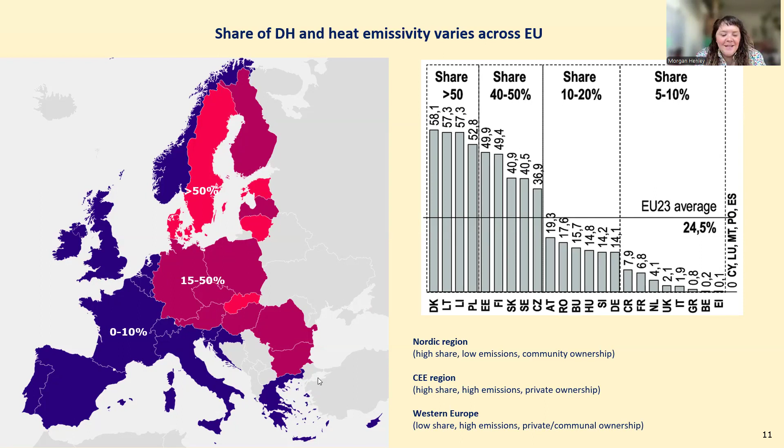I'm based in Prague, Czech Republic, so characteristic of the whole region, there's a lot of aging systems. Here it's still a lot of coal use, but some going to gas. Here are some numbers. Whereas in the Nordics, there's a quicker transition to renewables, and the Baltics are something in between. I think we'll see the innovation that's happening there.

So when you have these existing systems that were built maybe 60 years ago or more, how do you change them if they're based on really high temperatures, needing combustion to produce the heat?

There's a few different suggestions that we would always ask to consider. So, big renewable integration, so large heat pumps, and that can come from seas, rivers, air, geothermal, waste energy from cooling or from industry. So the waste heat integration can also be from whatever kind of industry you have - it might be applicable, it might not.

It would really depend on your circumstance. Deep geothermal, that's of course going to be if you have the capability to do it - not every geography will be able to support it. I know it can be a complicated and expensive process, but once you have it, it's quite reliable.

And then also, one thing that we are always trying to advocate is just to diversify - that instead of having one big plant burning coal or gas, that you have different sources. So also they can be used at different times when there might be a better opportunity for one versus the other. And also sector coupling, so really being able to pair different things together, which will also help with flexibility.

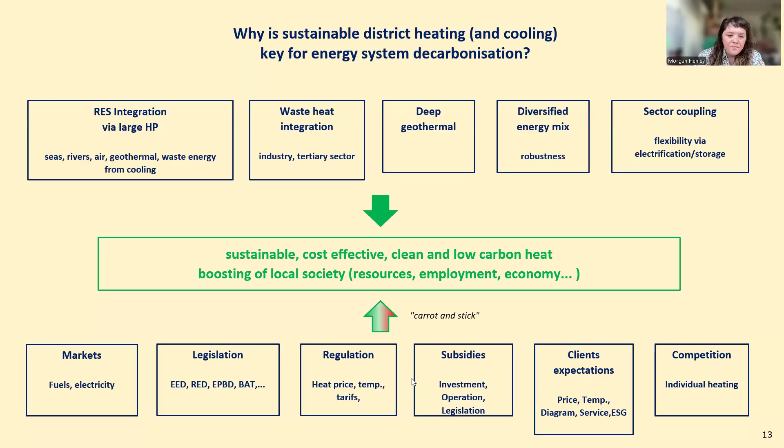So, as I mentioned before, EU legislation - I think many of us understand the need and how important heating is in the entire energy mix of the EU. It's a bit unfortunate, but the heating sector is kind of hidden in multiple pieces of legislation.

The Energy Efficiency Directive, the Renewable Energy Directive, and the Directive on Energy Performance of Buildings. Before that there was the EU heating and cooling strategy, but it's quite outdated by now. Maybe we'll get a new one in the coming years.

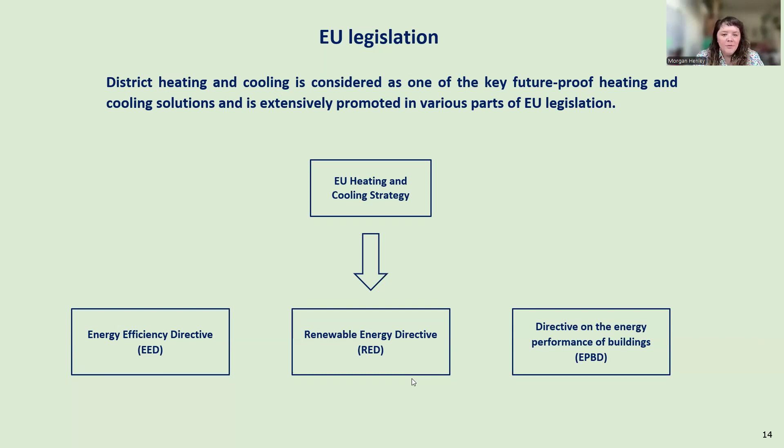But I think the one that's most important for us is the Energy Efficiency Directive, the EED. It's quite long, with many different provisions in it, but the one that's most useful for us to look at here is the heating and cooling assessment and planning.

There's a lot of text and requirements in here, but I've highlighted the general main points. This is the actual language of the legislation - you need to do the assessment, make sure stakeholders can participate, do a benefit analysis for the different policies, and identify what the potential is.

And then there's this planning requirement for municipalities of 45,000 inhabitants or more. There's a lot of different things to consider when doing these plans.

What we provided in this methodology is a checklist of all these things to look at - discussing with different stakeholders, considering existing energy infrastructure, putting energy efficiency first. This is the whole guiding principle of the EED.

Mapping the potential of how to improve the energy efficiency in homes or buildings. Also making sure vulnerable households are considered specifically.

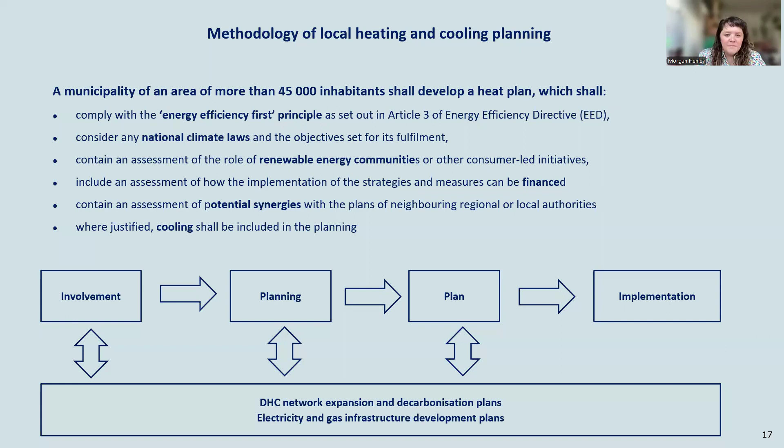So I added a theme to the images for the rest of the presentation. I don't know if you know this series of children's books - it's called Busy Town. It's American - I'm from the US - and it's basically about a happy town where you have different animals living together.

I thought it was kind of a nice idea for thinking about how we actually need to plan our district heating - everyone needs to be in touch with everyone, talking about how can we help each other and how can we find the best ways to cooperate.

So here is again a list, and just to reiterate - the municipality when doing these plannings really should look at the different stakeholders, so all the affected different public authorities, businesses, public interest groups.

So large scale consumers of heat or gas - the big companies, if they're using a lot of gas, how would they be able to transition out of that for their heating needs? Or small businesses that also need to be considered, but might be using quite a lot - whether it's grocery stores or malls or schools, if you're getting to the public sectors.

Then, the bordering municipalities - the 45,000 threshold shouldn't be a strict requirement, but if there are smaller municipalities around, it's important to go hand in hand because there can be synergies. Associations of municipalities, depending on where you are, state authorities, real estate companies - they know what the building stock is like, so it can be important to speak with them and they can also help plan future district heating connections, as well as chambers of commerce.

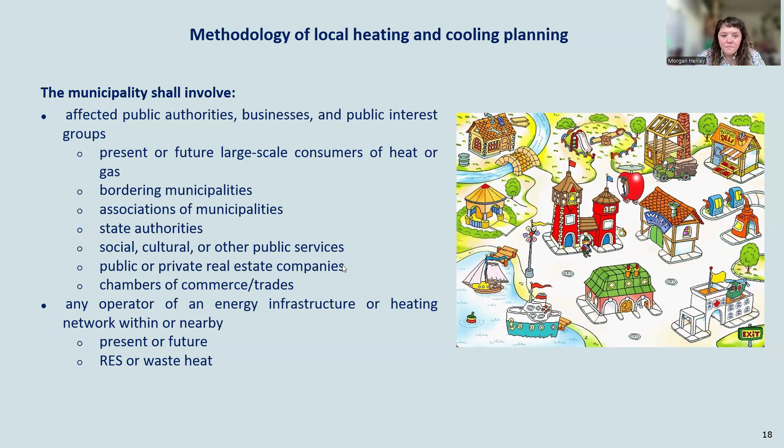This is really getting into the things to look at - inventory analysis: the consumption, the temperatures, the emissions, the generators, the heat sources, the networks, what's decentralized, the building stock. All of that is data heavy stuff, but it's the way to see what you have at your disposal as an asset, and also the things to work and improve on for energy efficiency.

Then potential analysis in a quantitative and spatially differentiated manner - the energy savings potential in different residential or commercial processes, the potential for generating heat from renewables, waste heat, or central heat storage.

And then known restrictions - if there are things already known that can be done. For instance, if you know there's no geothermal underneath your ground, or it was looked at and can't be done, things like that.

And again, the target scenarios looking at the final year, but then also progressively the intermediate goals.

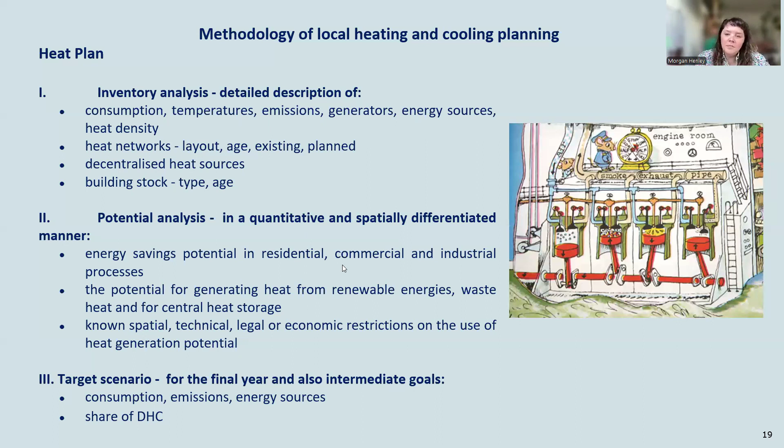So different heat area supplies for the construction or expansion of district heating and cooling, for decentralized heat supplies in areas with increased potential.

Then description of types of heat supply - very probable, very suitable, or not suitable. Just really mapping out and saying this is very likely to be - if you have a river, very likely you could put a heat pump on it. If it's really cold or something, then maybe not. So it will all really depend on your geographical reality.

And then the most important thing is the implementation. A plan is only as good as it is used, so really making sure that it can be put into use. What are the dates? What are the costs? Who's going to pay the cost? What are the positive impacts the measures will have, and what are the objectives of it?

Also measures on how to target the consumers to make sure they're brought along in the process as well. Risk and sensitivity analysis needs to be done when implementing. And there might be specific scenarios that come up with district heating consumers or producers that may also have to be handled case by case.

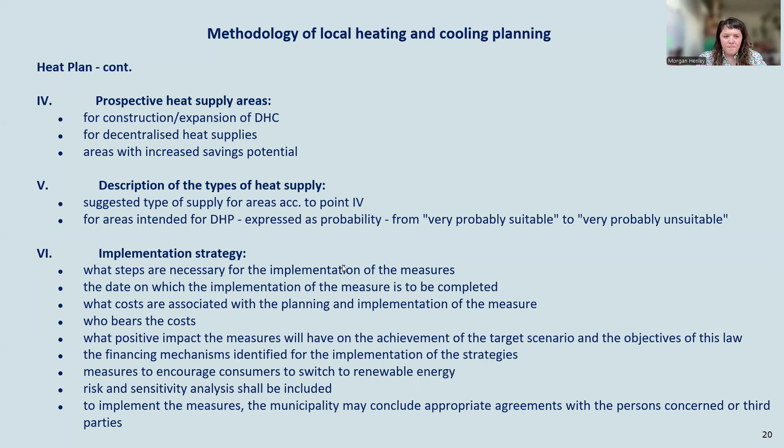Then also the requirement on the operators of the heating networks, because this was before really from the municipality point of view. But this can really only be done if they're working together.

So drawing up the heat expansion plan needs, from the heating networks, a description of the state of the network itself - how are the pipes, how are the heating fuel sources, what is the potential that they know of, what are the future development plans, do they have any decarbonization targets, are they planning to expand, and what do they really need in terms of investments?

Every district heating company and municipality is going to be different - there's no one size fits all. There's a saying that you can't understand another person's marriage, and I think you can't understand another district heating company because there are so many different specificities to it - you really need to know it inside and out yourself from your own personal experience.

But all of that to say, I think talking to the businesses, talking to the municipality, seeing what you have available - these are things that I think were done really well in Salaspils, really looking around and figuring out the puzzle of what's there. So I'm really happy that you can see that in action with the next presentation from Ina. And again, happy to send out the methodology and discuss it with anyone if interested.

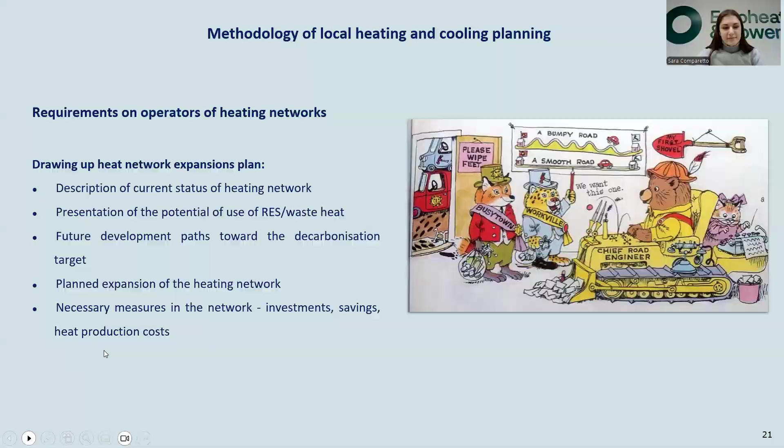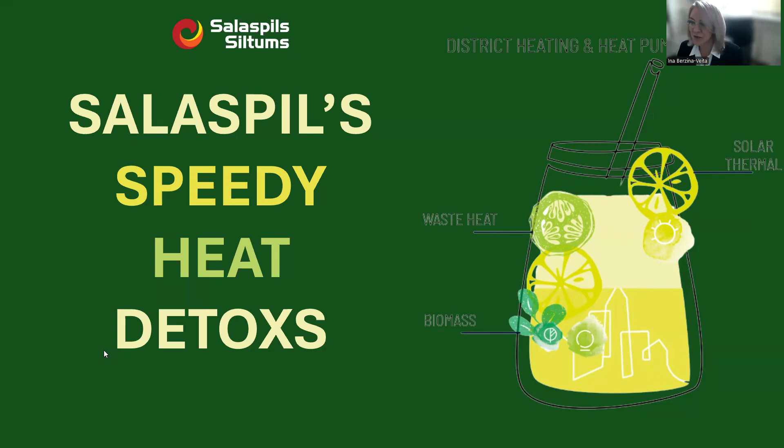The topic of my presentation is actually Salaspils' speedy heat detox, but I'm going to talk about a little bit more than 10 years. So, then we can decide, is it speedy or not.

My name is Berzina-Veita, and I'm managing director of Salaspils Siltums district heating company, and also president of the District Heating Association in Latvia. My aim is sustainable energy, and I'm focused on emission-free technologies. That's what I've been looking for more than 10 years already.

So a little bit about Latvia. More than 65% in Latvia are using district heating energy, and there are 2,000 kilometers of pipe with quite low heat losses. This is the result of the last years of work.

As you know, Latvia is a small country with only 1.9 million inhabitants, and a big part, nearly half, is living in Riga. Riga is also the biggest district heating system in Latvia.

Salaspils community is placed just behind Riga, with only 24,000 inhabitants in the municipality, and we are serving about 20,000 of them with district heating. There are three areas: Salaspils, the major city, and then Saulkalne and Acone. In Acone we are only the operator, taking heat from the same CHP plant that supplies Riga. We are an operator trying to do it as efficiently as possible in this small village.

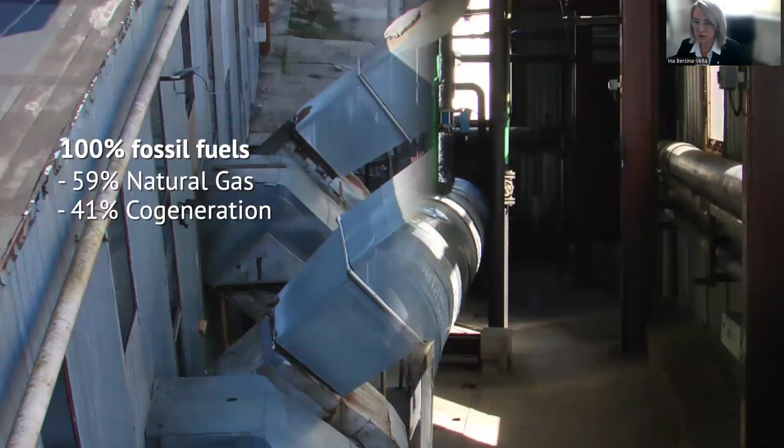A little bit of history: I came to Salaspils Siltums in 2011, and it was like a horror movie at that time. Everything looked just horrible. Production was horrible, 100% fossil fuels. There was one company renting the premises and producing heat with cogeneration on gas. It was the city with one of the highest tariffs and big debtors, no money.

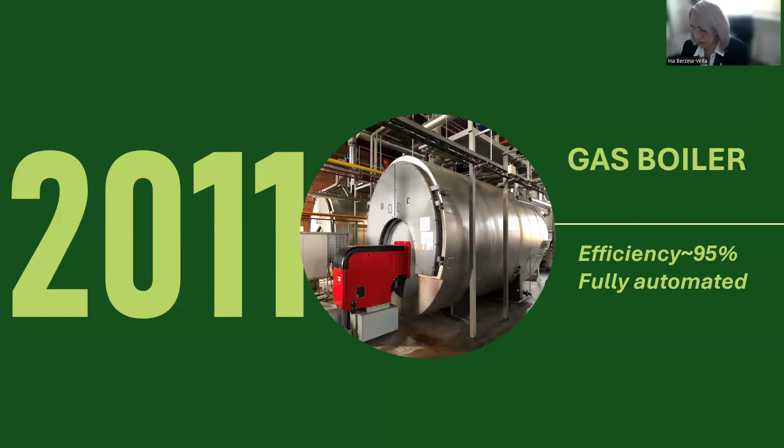So what we did first was inspect everything, and we replaced the old, inefficient gas boilers with new automated ones. That was the first step we took.

Then the next and most important step in the meantime was the remote data control system, where we can see online what we are doing, how is the consumption, temperatures, and all those things. We also did the project and plans and changed the pipelines. You can see the old ones, and now we are 100% insulated and finished with those things.

Actually, with changing the control system and changing the pipelines, that first year there were 25% savings of heat, which means it wasn't just the losses in the pipes, but also the incorrect readings of heating consumption, you could say.

In the meantime, we got into a European project and built the first wood chip boiler. After a while, we also added a flue gas condenser to this boiler to increase efficiency and produce more from the same fuel.

So today our structure looks like this - the production structure, and here are the priorities. First priority is solar. The next priority is wood chips, and the third, like a peak source, is natural gas.

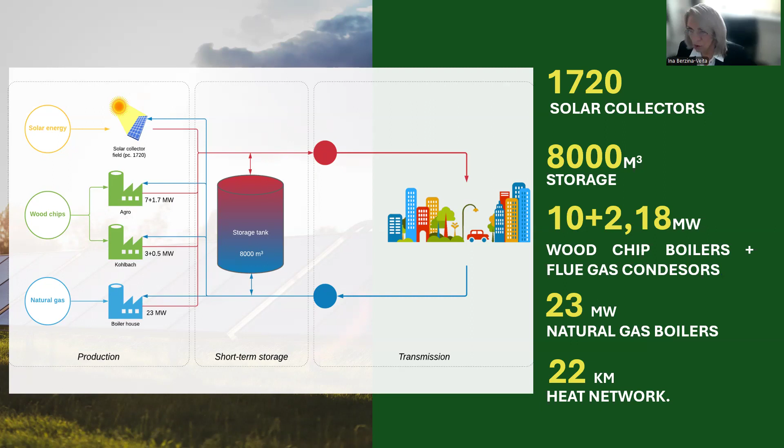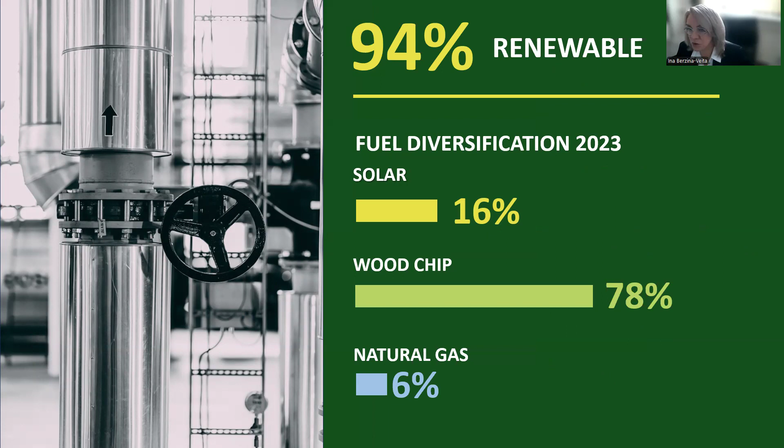We still have our old previous gas installations, but we're not using them so much. That's how our diversification looks today: 94% renewables, including solar, and 6% natural gas.

So what we've gained: today we've decreased CO2 emissions by 93%, based on last year's data, and we also reduced the annual heat losses from 22% to less than 10% per annum.

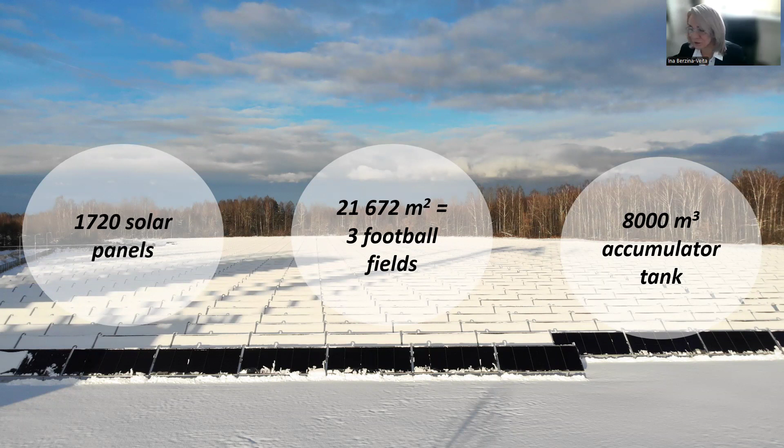That is the size of our solar field. That's how it looked about 3 days ago, when we last had winter weather. And yesterday, although there was snow, it melted, and we produced 22 megawatts of heat from solar.

It's already empty, and now we have a ready project where we want to replace and take away as much gas as possible, especially during summertime - it's a good place for a heat pump here.

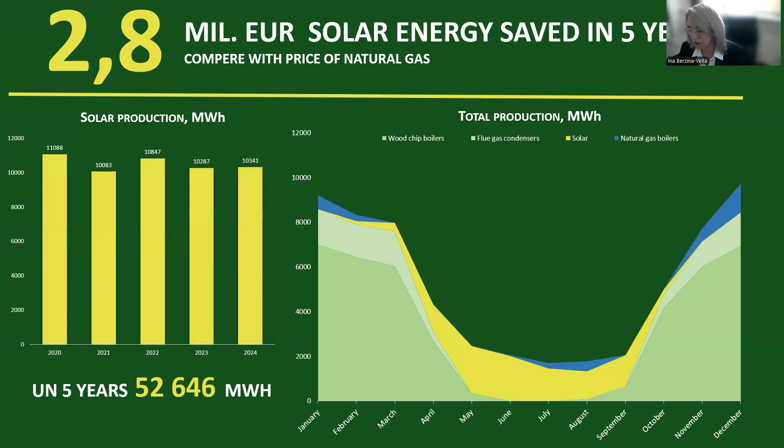We also had our own investment, including emission trading quotas, which we saved because of renewables and reducing CO2.

It's very important that when we put in the remote control system, we have a bigger connection with inhabitants. We talk with them, helping to set the right temperatures for their houses. With this controlling and communicating with every house, we reduce consumption because it's optimal, not too hot - we regulate the automatic system so it's used as optimally as possible.

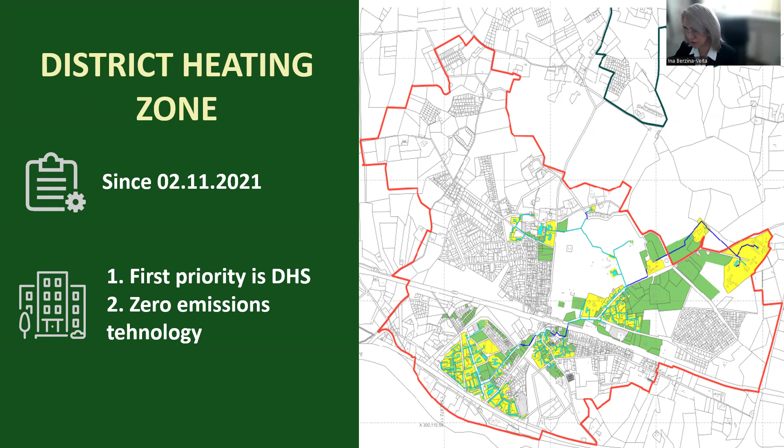It's very important to have good cooperation with the municipality, and we really do. We settled the district heating area in Salaspils, as you see on the map. In Salaspils municipality, the first priority is district heating, and then zero emission technology in areas where we can't supply district heating technically or economically - where it's too expensive or impossible to supply. But anyhow, district heating is first, and next is zero emission technology. You can't put anything which is burning in this area - you can put a heat pump or electrical.

The next steps, which we've been working on for several years, are electrification and digitalization. When we talk about digitalization, we're talking about a twin system for our production and supply system, because we are becoming more and more complicated. With electrification, we've been working for several years, and we got one project across the road here - they are putting in a data center, and electrification for us means several things. The Baltic region just switched off from the Russia and Belarus electricity grid, and we are very good at taking off the electricity peak and balancing the electricity networks.

So we are putting in an electrical boiler. We are planning electrical batteries too - now we have heat accumulation, and we will also have electrical batteries in order to even out the price of heat production for us. As I said, we are looking at possibilities to burn as little as possible - not only gas, which is already very low, but also wood chips.